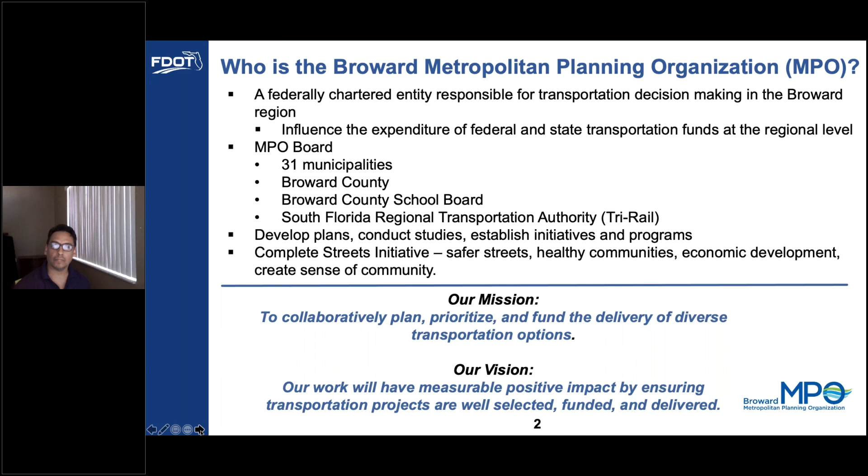This evening's agenda will include the following: introductions, meeting format, non-discrimination policy, rules of engagement, project location and project improvements, project overview, traffic impacts, community outreach, questions and answers, and contact information.

Introductions. The project partners are the Florida Department of Transportation, the Broward Metropolitan Planning Organization, and the City of Fort Lauderdale. The construction team consists of Eric Namati, PE, FDOT Construction Project Manager; David Romano, PE, Project Administrator, HDR; and Justina Hicklin, Community Outreach Specialist, the Valerin Group.

The design team includes Tuck Lee, PE, FDOT Design Project Manager; Alejandro Leon, PE, Design Build Project Manager, A&P Consulting Transportation Engineers; Andrew Parita, Landscape Designer, Miller Legg; and William Moeller, CA, arborist, biologist, Miller Legg.

The construction contractor is Elliott Akel, project manager, Weekley Asphalt Paving Incorporated. With the City of Fort Lauderdale are Karen Warfel, Transportation Planning Program Manager, and Mark Williams, Urban City Forester. With the Broward Metropolitan Planning Organization are Ricardo Gutierrez, Mobility Program Manager, and Buffy Sanders, Principal Planner.

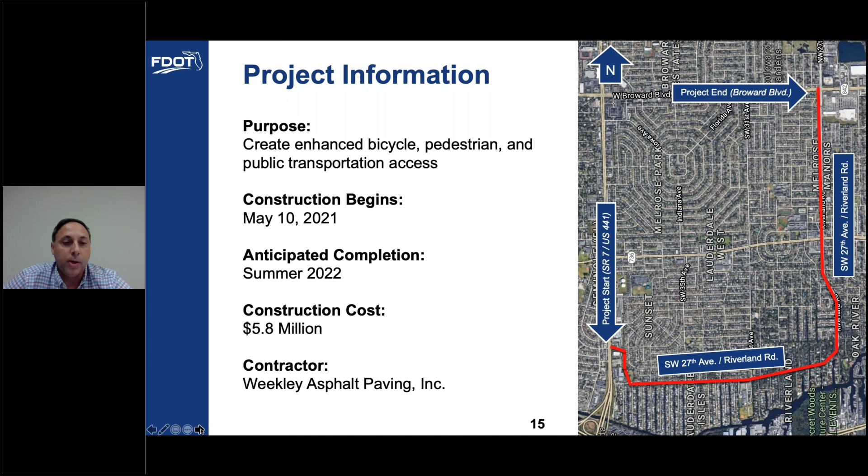Construction will begin May 10th of this year, with an anticipated completion date of summer 2022, at a construction cost of $5.8 million. The contractor performing the project improvements is Weekley Asphalt Paving, Inc. Next slide, please.

Slide number 16. The project improvements consist of widening the outside northbound lane from State Road 7/441 to Tortugas Lane to accommodate 5-foot buffered bicycle lanes. Similarly, we are widening from Tortugas Lane to Davie Boulevard, State Road 736, along the outside lanes to accommodate 5-foot buffered bicycle lanes and 3-foot unpaved shoulders.

We will be performing driveway tie-ins and reconstruction as needed. And we will be repurposing the outside lanes from State Road 736, Davie Boulevard, to State Road 842, Broward Boulevard, to accommodate 8.5-foot buffered bicycle lanes.

We are also going to be installing traffic signal mast arms and pedestrian signalization improvements located at the mid-block crossings at Southwest 34th Terrace and just north of Southwest 11th Court. We will also be installing sidewalks, signage, curb, and gutter.

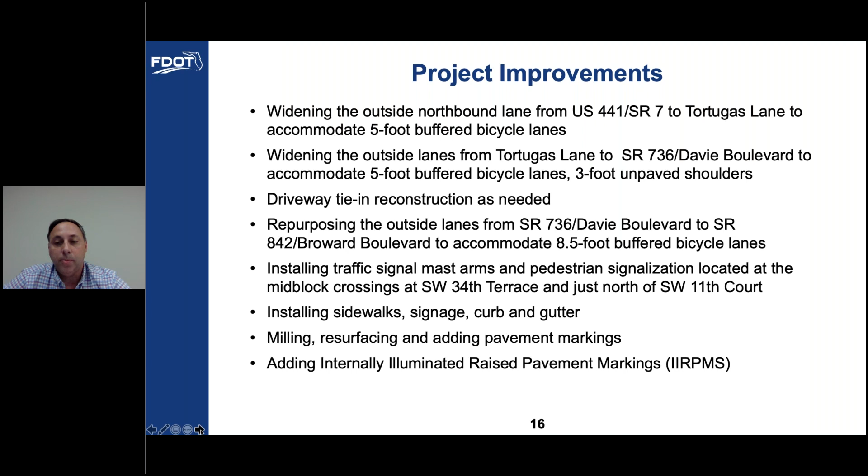We will be milling and resurfacing the pavement and adding pavement markings, including internally illuminated raised pavement markings to further enhance the bicycle lane.

At this time, I would like to introduce Alejandro Leon. He is the design build engineer of record to discuss project overview and components.

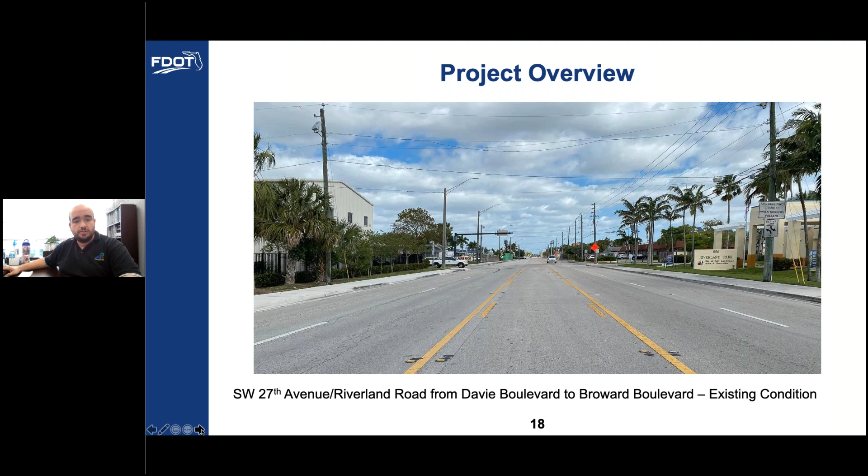Thank you. I'm going to be starting here on slide 18. This is an existing picture of Southwest 27th Avenue, the typical that you can see between Davie Boulevard and Broward Boulevard. As you can see, the existing condition is a 5-lane undivided facility with 2 lanes in each direction and a 2-way left turn lane in the middle.

The proposed condition will repurpose the outside lane to serve as a buffered bicycle lane. With 3 travel lanes, the road will remain as a 3-lane undivided facility with a 2-way left turn lane in the center.

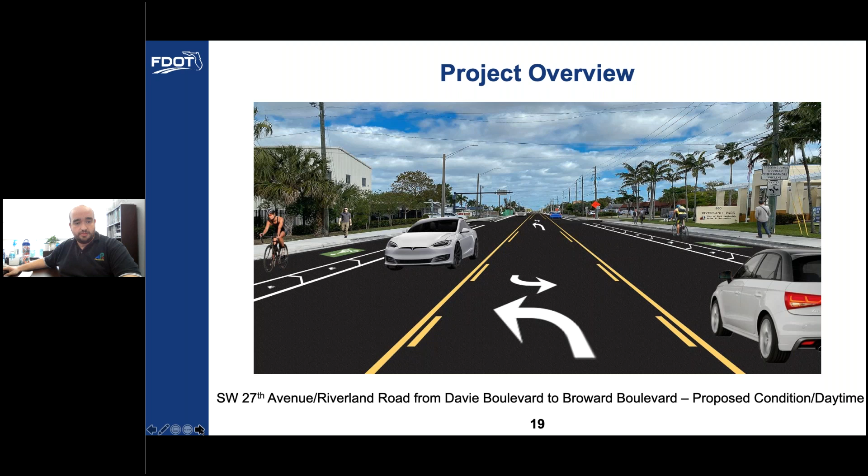Slide 21. This is a picture of Riverland Road between Southwest State Road 7 and Davie Boulevard. The existing condition is a 2-lane undivided facility with sidewalk on primarily one side of the corridor. It's a mix of asphalt and concrete on the sidewalk.

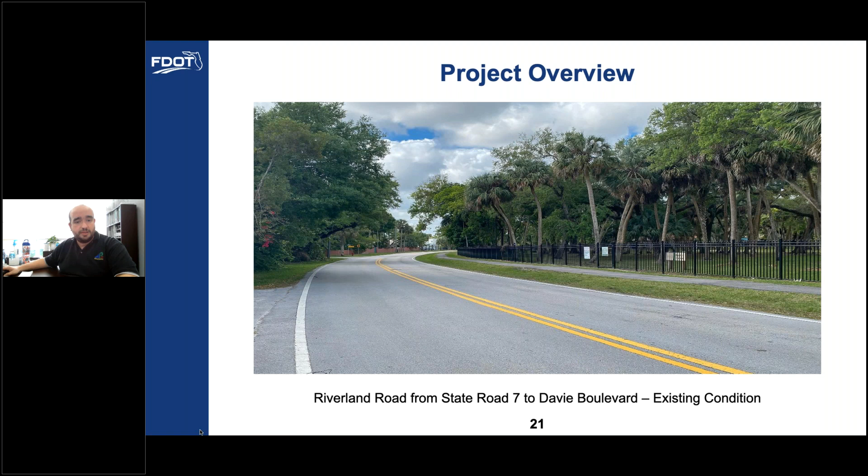The proposed condition: the roadway will remain a 2-lane undivided facility, but the roadway will be widened to provide 5-foot buffered bicycle lanes in each direction.

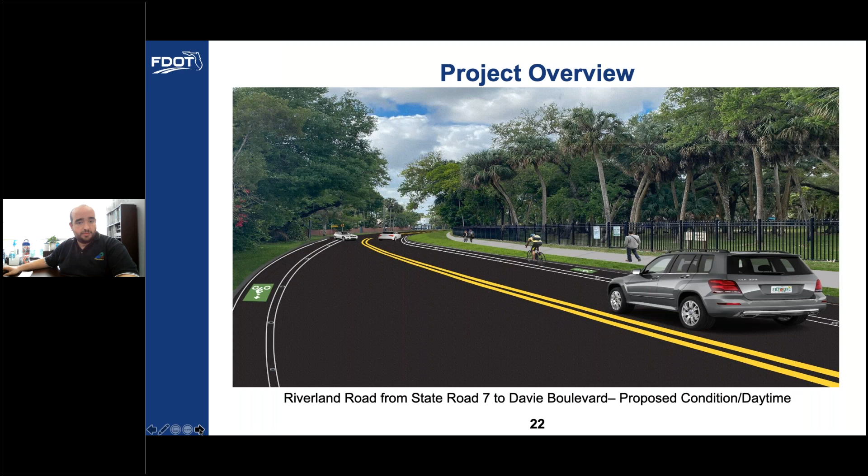This is a more pictorial proposed view of Riverland Road, between State Road 7 and Tortugas Lane. The road will have 2 10-foot lanes in each direction, 5-foot buffered bicycle lanes in each direction, and sidewalks in both directions: 7 foot on the right-hand side, and 6 foot on the left-hand side.

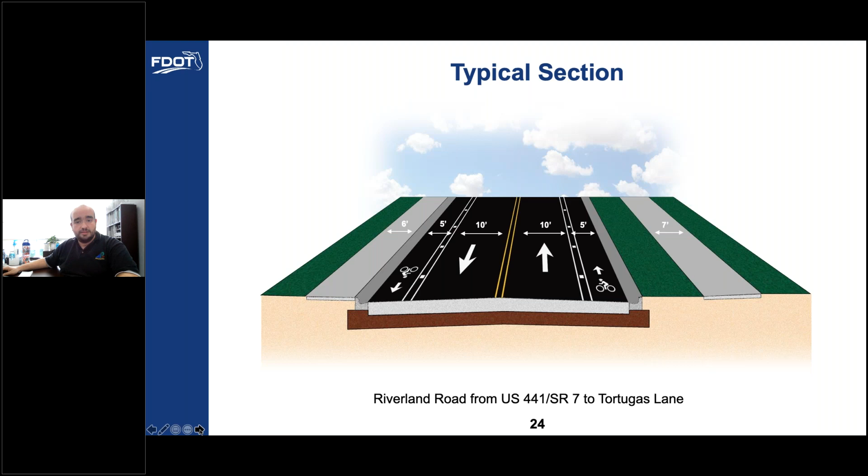From Tortugas Lane to 31st Avenue, we'll start the open swale section. The roadway will be widened to provide 2 10-foot travel lanes and 2 5-foot buffered bicycle lanes in each direction. We will provide 3 feet of unpaved shoulder and regrade the swales, providing a 5-foot sidewalk in each direction.

This is the typical of the roadway between Southwest 31st Avenue and Davie Boulevard. The roadway typical will remain the same. There'll be 2 10-foot lanes in each direction, 5-foot buffered bicycle lanes, and making the sidewalk on the left-hand side of the corridor continuous, a 5-foot sidewalk from 31st to Davie Boulevard.

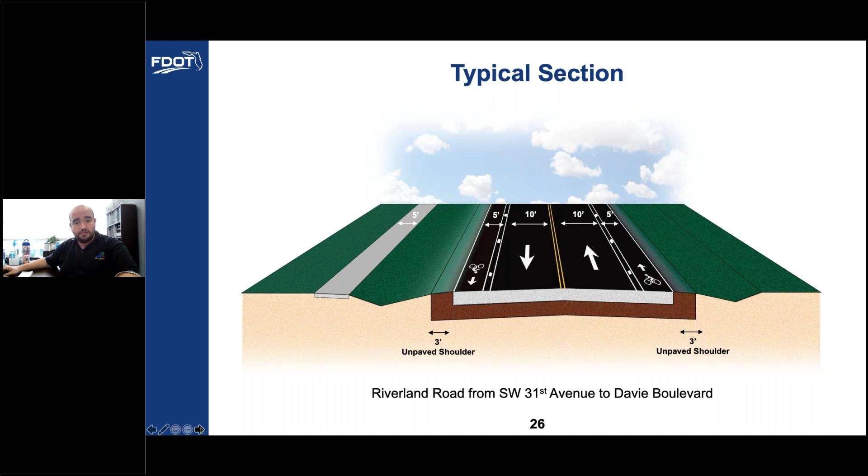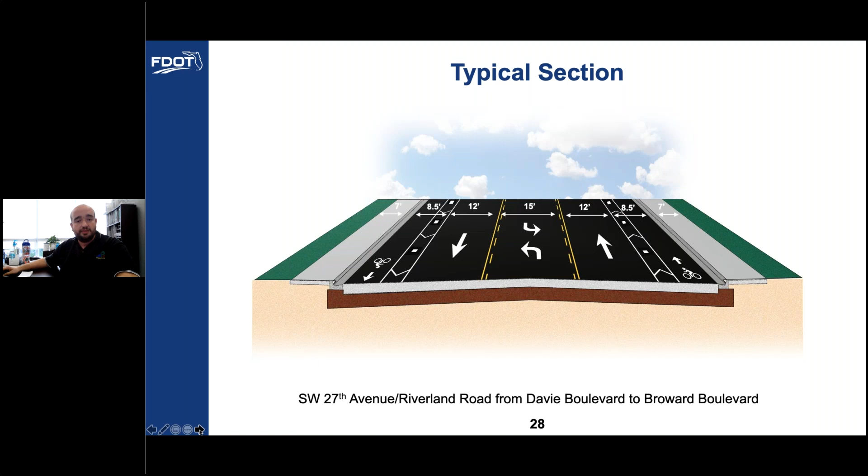Slide 28. This is the proposed typical section that we'll be using on Southwest 27th Avenue between Davie Boulevard and Broward Boulevard. As you can see, the outside lanes have been repurposed to provide buffered bicycle lanes, and the road will remain as a three-lane undivided facility with a 2-way left turn lane in the center. In general, within this section, the existing sidewalks will remain except for ADA improvements at the corners.

Thank you, Alejandro. Traffic impacts for this project can be expected as follows: lane closures may occur from 9 a.m. to 3:30 p.m. Sunday through Saturday. All left turn lanes will be maintained during construction. Access to emergency services, businesses, and residences will be maintained at all times.

I'd like to move on now to our community outreach efforts as part of this project. Next slide, please.

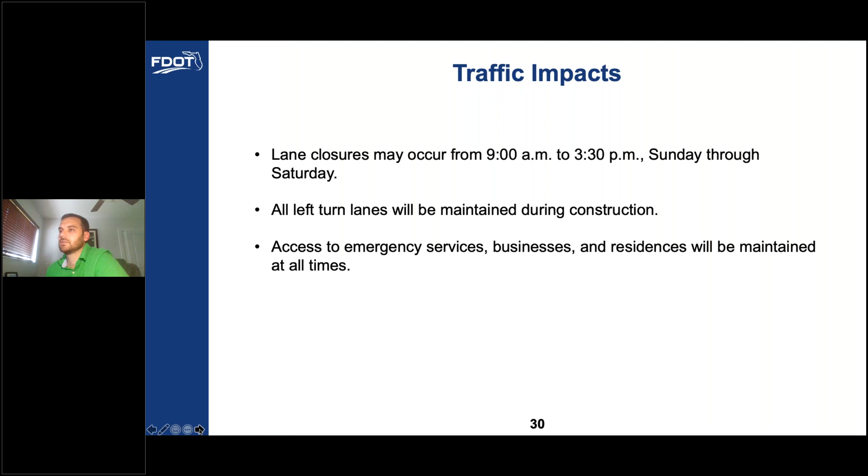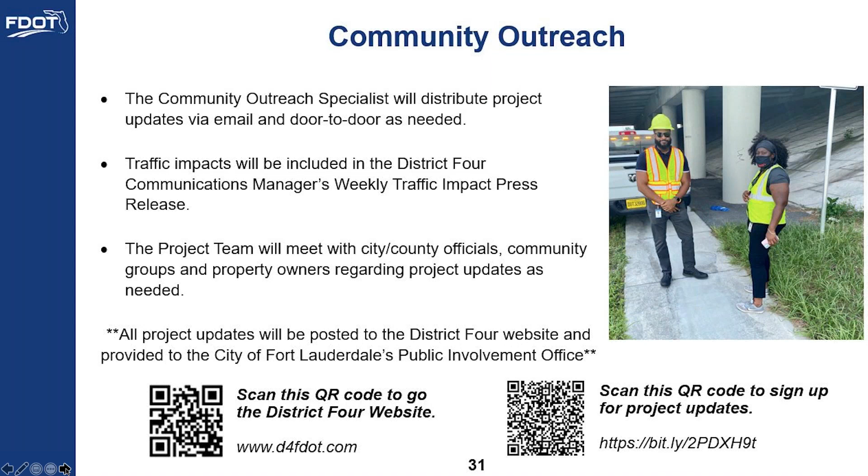Community outreach specialist Justina Hicklin will distribute project updates via email and door-to-door as needed. Traffic impacts will be included in the Florida Department of Transportation District 4 Communications Manager's weekly traffic impact press release. The project team will meet with city and county officials, community groups, and property owners regarding project updates as needed. All project updates will be posted to the District 4 website and provided to the City of Fort Lauderdale's Public Involvement Office.

At this time we will go ahead and start the question and answer portion. All comments and questions submitted through these options are part of the public record for this virtual public meeting and will be reviewed by the department. Attendees are welcome to submit questions or comments using the GoToWebinar question panel.

Good evening. My name is Justina Hicklin, and I will be the Community Outreach Specialist for the Riverland Road Mobility Improvement Project. Tonight I will be moderating the question and comment period with Mr. Eric Namadi, who is the project manager. At this time we do have some questions that came over from our first period. You may either continue to type questions into the question panel or use the raise hand icon.

At this time I do see a new question from Mr. Michael Smith. Mr. Smith, at this time you may go ahead and unmute yourself to ask your question. Good evening, Michael Smith. Can you hear us?

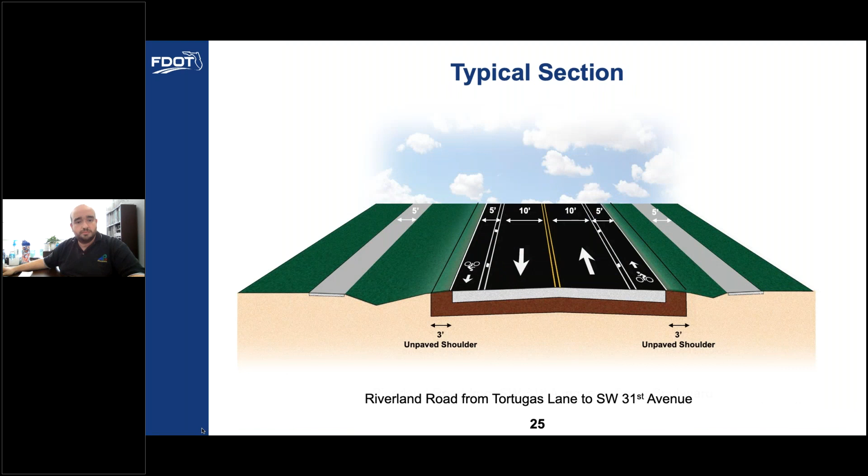One moment, please. So if you want to pretend you were standing on the road and looking at this picture, you will be standing facing towards Davie Boulevard, so you would have State Road 7 behind you.

I'm sorry, which direction is north here? The left side is north? Yes, the left is north. If you were standing on the bridge looking, you would be heading towards Davie Boulevard. Okay, the way I'm looking at it, it looks like the walkway is on the wrong side, but okay — so the walkway will be contiguous with the sidewalk we have currently, only larger and wider. Correct. Okay, thank you.

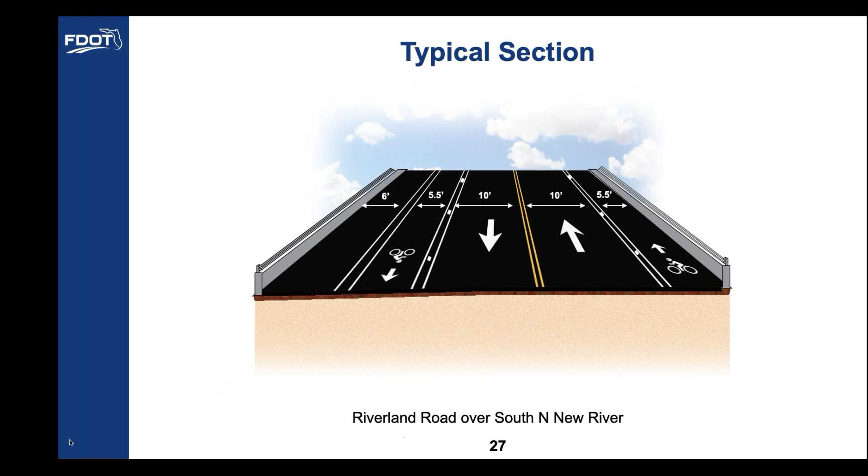Hi, this is William Moeller with Meadowleg, Certified Arborist. The oak tree proposed to be removed is nearest the bridge we were just discussing, on the north side, and it's leaning. It has codominant leaders and is in poor condition. The majority of the trees being removed are in close proximity to that small bridge, including invasive exotic trees and the strangler fig we discussed earlier, which is growing on top of a utility line. Those trees being removed are not large trees, mostly smaller sized trees in fair and poor condition. Thanks.

Thank you, William. I'd like to add that the project team will be tagging the trees to be removed with orange ribbon tape, starting in the next couple of days. They'll put orange tape around the trees to be removed. We have a total of 18, correct, William? Yes, sir.

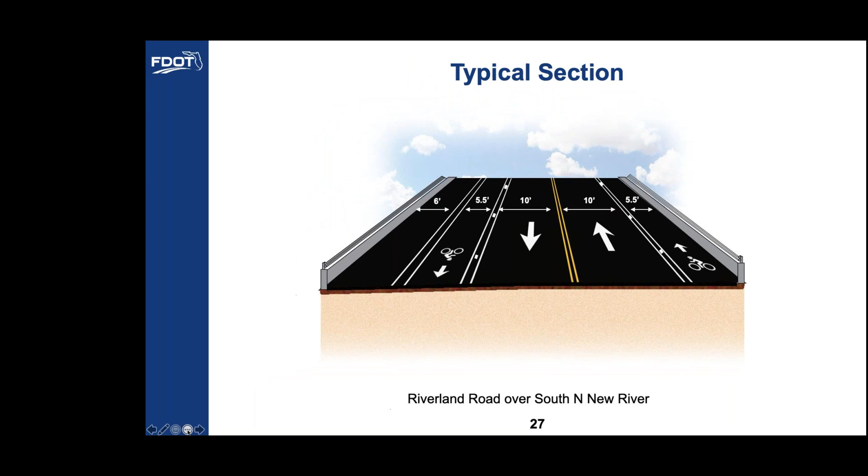William and Andrew. Yes, this is Andrew Pareto with Middle Atlantic Landscape Designer. We coordinated with the city on the mitigation for those trees. Currently, we coordinated to mitigate it within the park, the Riverland Park that is there. If that's not a prime location, we can further coordinate with the city for another additional location to plant those mitigated trees within the site.

Thank you, because the Riverland Preserve Park already has over 400 trees in it right now, whereas the Riverland Woods Park down at the other end towards 441 could use some more trees in there. Okay, we can take that into consideration with further coordination with the city for those additional mitigations. Thank you. Thank you, Audrey.

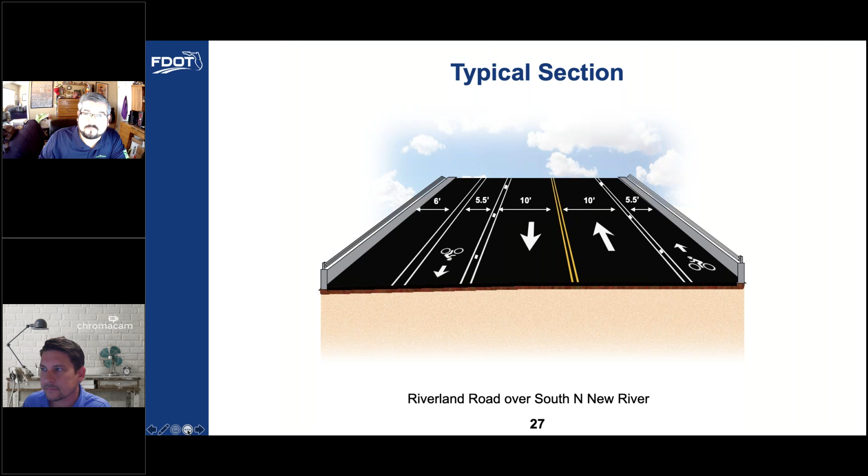I just had a question as far as the landscaping is concerned from Davie Boulevard to Broward Boulevard on 27th Avenue. Are there any plans for any beautification? It looks very industrial, so is it going to remain that way? Or are planters or any kind of design for the median in place?

This is Karen Warfel, I can take that question. With this project, we will not be putting medians in. However, we have been coordinating with the county, that's actually their road in that area, to add landscaped median islands from Davie to Broward Boulevard. So that will be coming as a follow-up project to beautify that corridor. Okay, thank you. Thank you, Denise, and thank you, Karen.

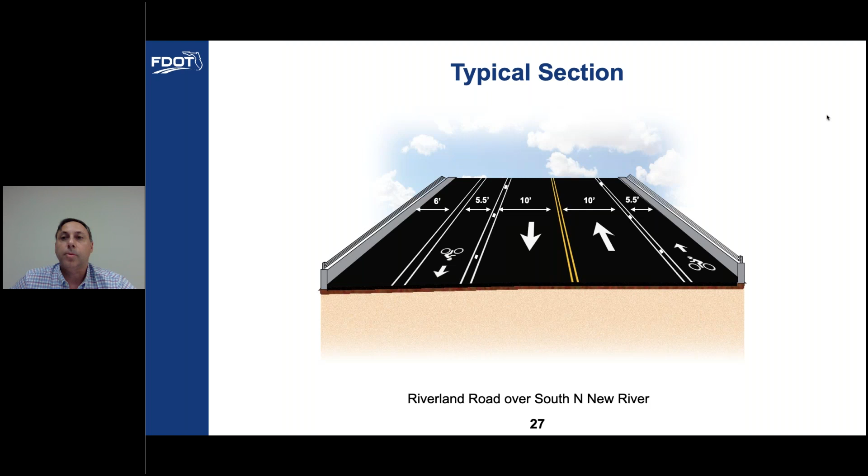Thank you, David. We also have a question from Giovanna Kraft regarding speed. First question is, what speed reduction measures will be put in place?

This is Karen Warfel from the city of Fort Lauderdale. With this project, the speed limit will be reduced to 30 miles an hour instead of 35. The project will also be adding some speed radar feedback signs where if you're going above the speed limit, they flash at you and tell you to slow down. Additionally, the city will be designing some larger traffic calming efforts.

We just kicked off with our consultant this week. We anticipate, with their schedule, they're reviewing all of the previous information we've heard over the last several years. They're going to put some ideas together. It hasn't been finalized what those might look like. We're looking to them to be creative about what would address the areas of most speeding along the corridor. We'll come out again for a similar virtual meeting where they can share some of their ideas with you all.

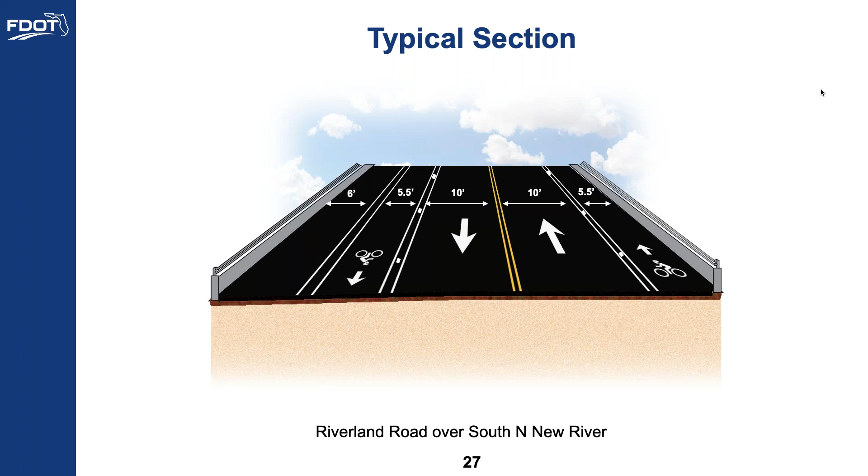Ms. Kraft is also asking if there will be any lighting improvements from 31st to the bridge. Our project is not proposing any roadway lighting in this corridor. However, we are proposing internally illuminated RPMs, which should delineate the roadway clearly even though there's no roadway lighting, and will also serve as a reminder of the separation between the bicycle lane and the travel lane.

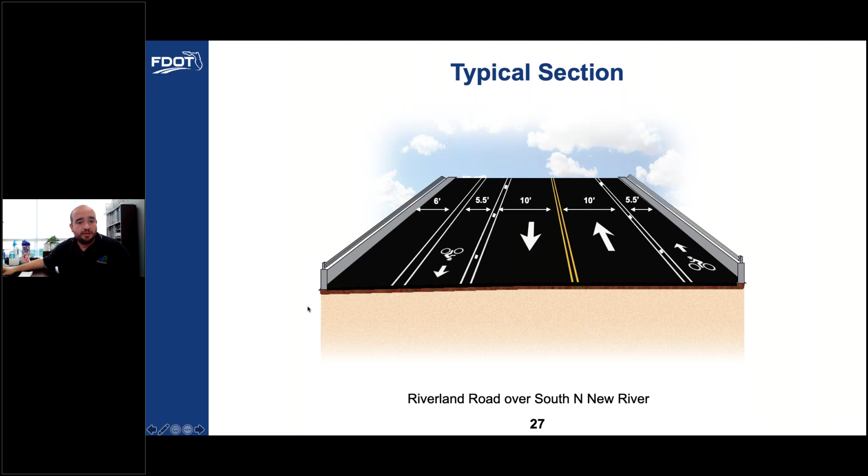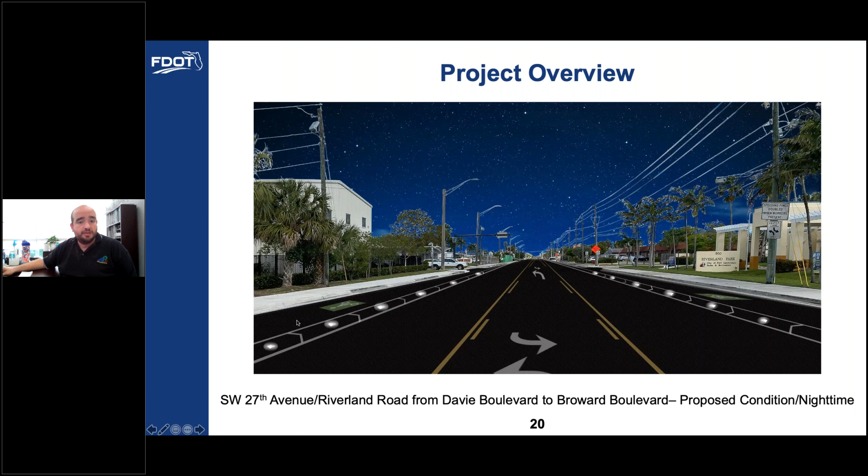Can you maybe go to one of the night examples to show what it will look like? Let's go to the section on the southern end of Riverland. The second night shot is more similar to what's going to be in the area the person was questioning. We're not proposing roadway lighting, but as you can see, the illuminated RPMs will help guide traffic in the curves in this area at night. With no lighting, it's beneficial to guide turn movements, and it also delineates the separation between the bicycle lane and the travel lane.

So they're little glowing things in the road - that's what internally illuminated reflectors are. Normally reflectors on a roadway catch your headlights as you're driving and reflect back at you at night. In this case, they're solar units with LEDs inside that remain illuminated throughout the night.

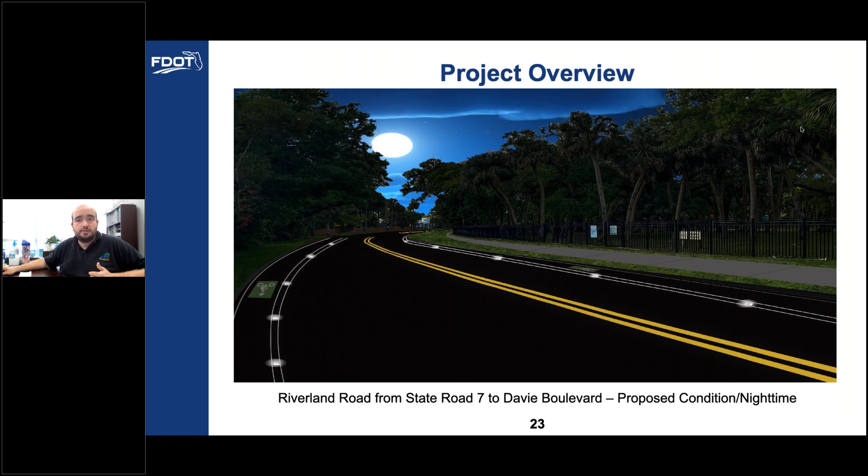Alejandro, I appreciate your comments, and I wish what you were saying was true. But living here 30 plus years or 40 years, we've seen a lot of crashes here, and my sense of things is that really isn't going to stop these crazy, distracted drivers. Thank you.